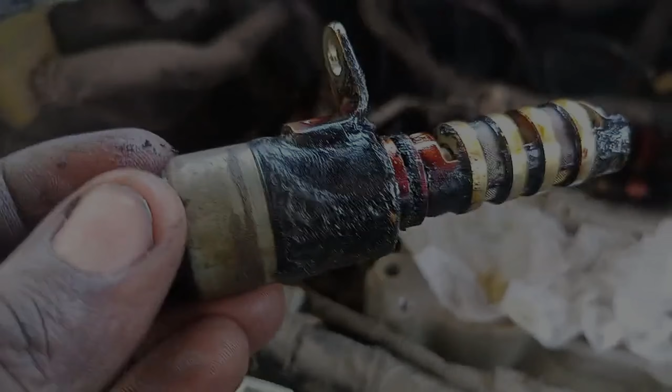Ignoring the P0018 code could lead to a $3,000 engine rebuild, but the real fix might only cost $50. Don't risk it. Watch to the end to find out why.

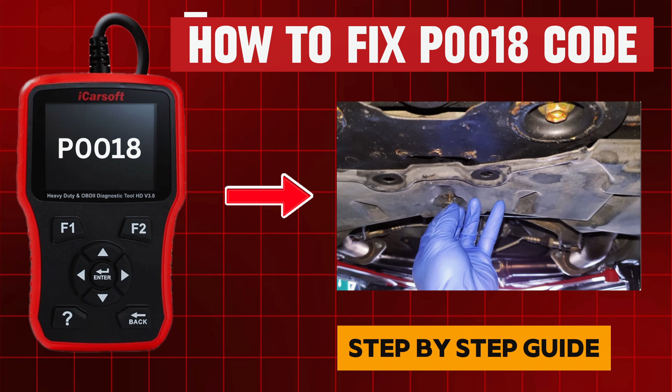Today, we're tackling a common but frustrating engine code, P0018. If your check engine light is on and you're seeing this code, it means there's a misalignment between your crankshaft and camshaft position sensors. Don't worry, I'll walk you through the possible causes and how to fix it step by step. Let's get started. What does the P0018 code mean? It indicates a crankshaft position, camshaft position correlation, bank 2 sensor A.

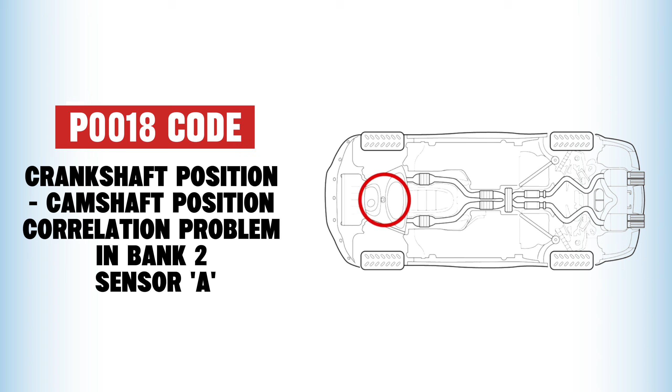Common symptoms of the P0018 code: check engine light, rough idle or stalling, reduced engine power, engine knocking or tapping noises, increased fuel consumption. Common causes of the P0018 engine code: timing chain or belt issues, faulty camshaft or crankshaft position sensors, oil flow problems, worn timing components, ECU or wiring issues.

Here are simple methods to fix the P0018 code. Method A: oil change. Tools needed: socket wrench, oil collection pan, funnel, new oil filter, fresh oil, airtight container.

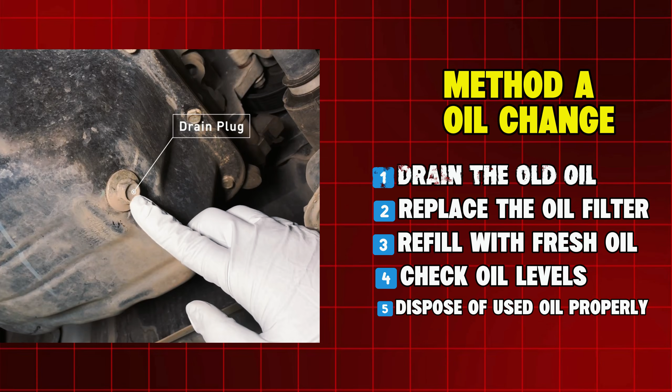Locate the oil drain plug underneath your vehicle and place a collection pan beneath it. Use a socket wrench to remove the plug, allowing the oil to drain completely. Once drained, reinstall and tighten the drain plug securely.

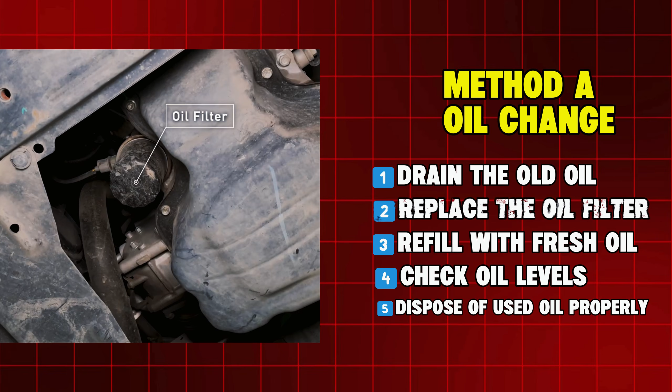Locate the oil filter near the oil pan or engine. Place the collection pan under it to catch residual oil. Remove the old filter, apply fresh oil to the new filter's gasket, and install it. Tighten it an additional 3/4 turn, avoid over-tightening.

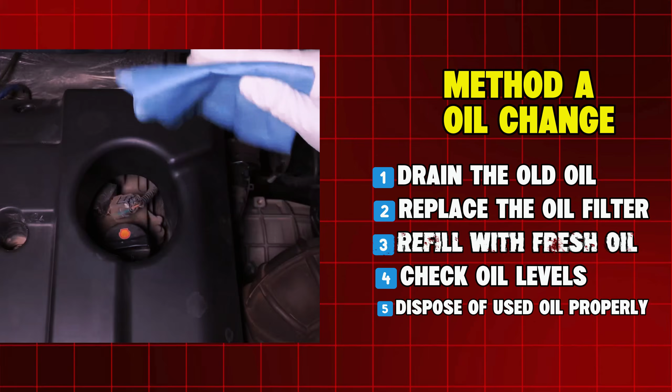Locate the oil fill cap on top of the engine, clean it, and remove it. Insert a funnel and pour the recommended oil amount, check your owner's manual. Replace the cap securely.

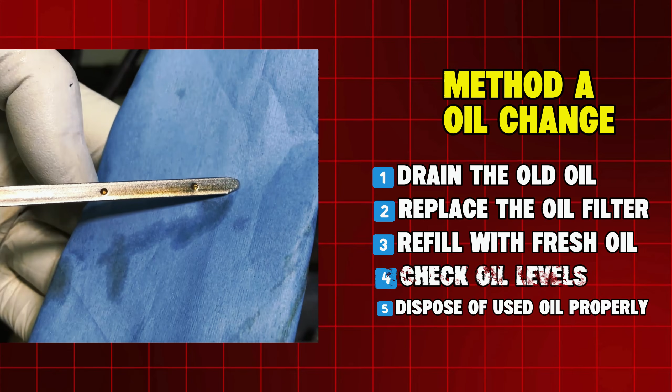Start the engine and let it run for a minute to circulate oil. Turn off the engine, then check the dipstick, wipe, reinsert, and pull it out again. The oil level should be near the full mark, add more if needed. Transfer cooled used oil into a sealed container and recycle it at an auto shop or recycling center.

Method B: camshaft oil control valve. Tools needed: valve cleaner, multimeter, replacement valve if needed. Found in engines with variable valve timing (VVT).

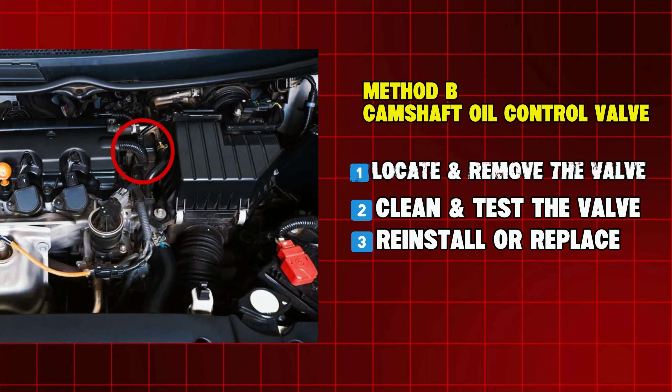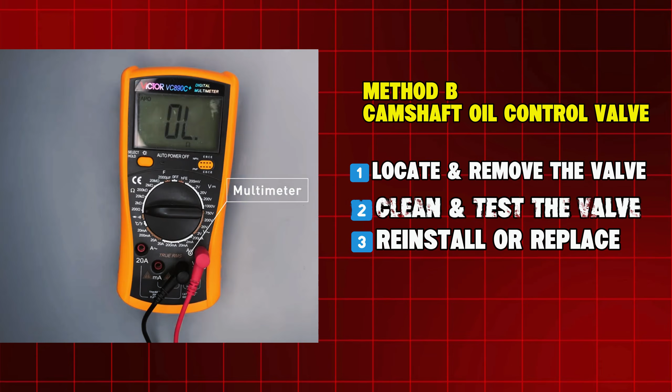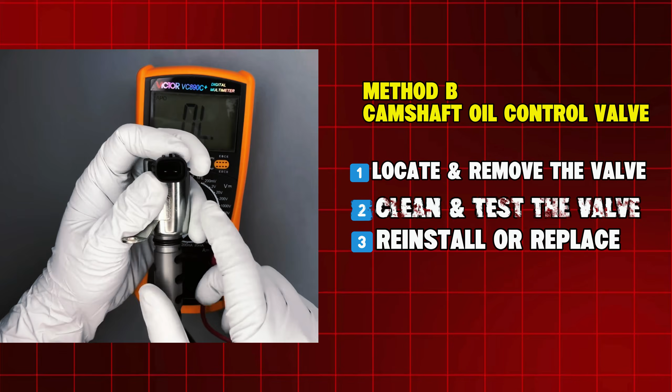Carefully detach the valve from the engine. Use valve cleaner to remove debris. Test resistance with a multimeter. At 68 degrees Fahrenheit, 20 degrees Celsius, resistance should be 6.9 to 7.9 ohms. No reading, replace the valve; reattach the clean valve or install a new one if faulty.

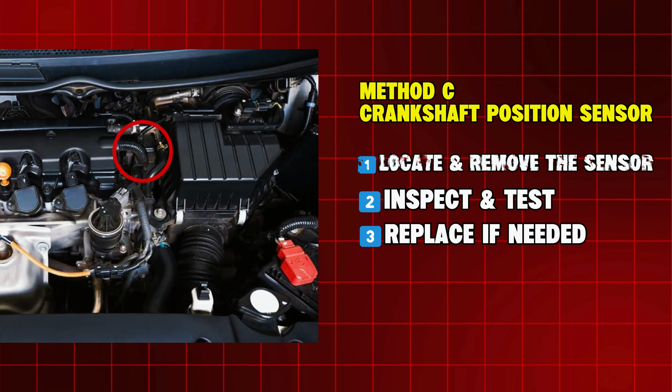Method C: crankshaft position sensor. Tools needed: multimeter, replacement sensor if needed. Typically mounted on the timing cover, front underside of the engine. Carefully unplug and remove the sensor. Check for contamination, for example, oil leaks.

Test resistance with a multimeter, refer to your manual for specs. No reading means the sensor is faulty. Ensure the O-ring is intact before installing the new sensor.

Method D: camshaft position sensor. Tools needed: multimeter, replacement sensor if needed. Found on the valve cover, cylinder head, or engine front or rear. Carefully detach the sensor, check for contamination, for example oil or dirt.

Test resistance with a multimeter, refer to your manual for specs. No reading, replace the sensor. Ensure the O-ring is in place before installing the new sensor.

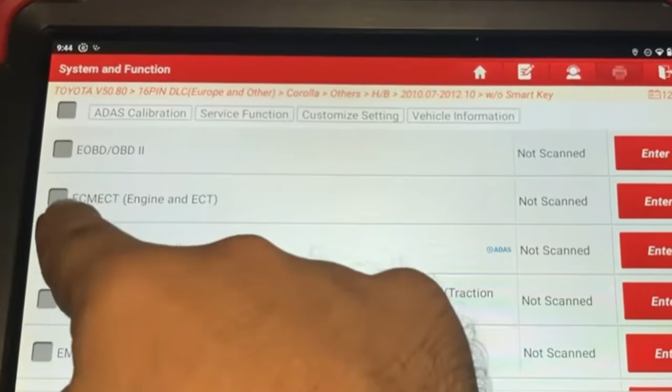Final tips: always consult your owner's manual for vehicle-specific details. Work in a well-lit, ventilated area and wear safety gear. Recycle used parts and fluids responsibly. After repairs, clear the code with an OBD2 scanner and test drive. If the light comes back, further diagnosis is needed.